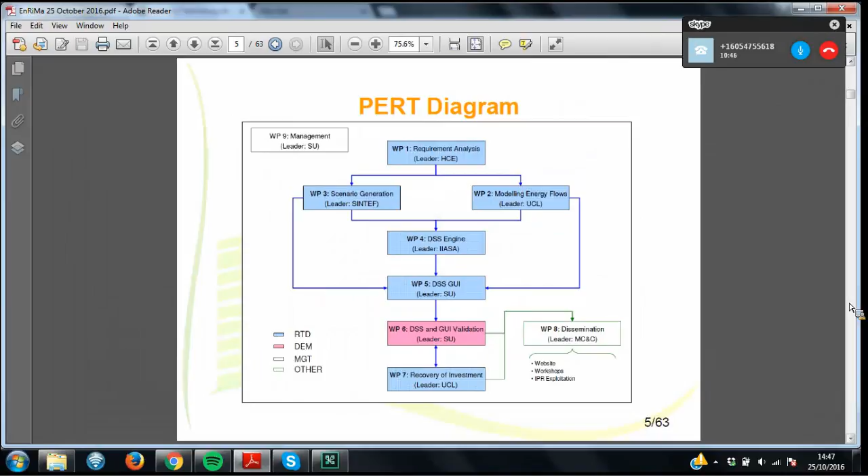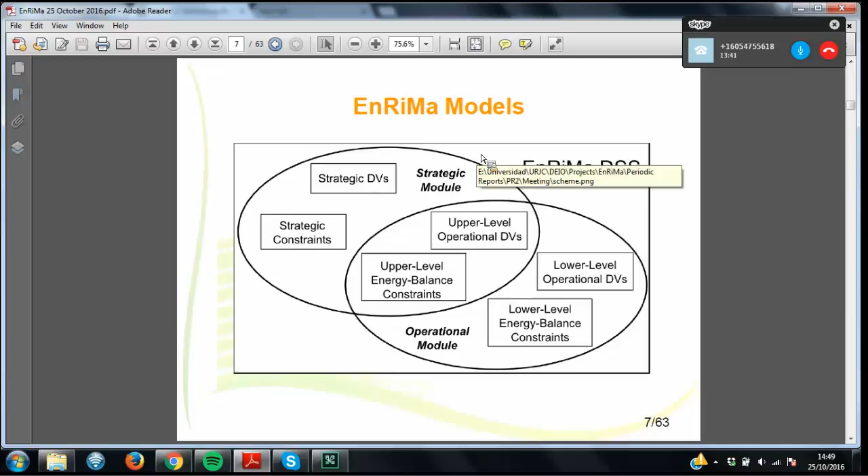Okay, so here is an overview of the operational module. So like I said, this is for the short term, and what you're trying to do is to take into account how the temperature in a given zone or a given room is going to be updated from hour to hour. This is one limitation of existing decision support systems that we'd identified.

What they assume is that there is a given energy load in every hour, and you have to figure out the cheapest way or the most cost-effective way to meet that energy load. So in effect, they're assuming that the energy load is exogenous. It is somehow data or a parameter that's being given to you, and you either have to meet it one way or the other. But in reality, that's not the case.

If you talk to a building energy manager, he or she is not going to say, I need so many kilowatt hours of energy. He or she is going to say instead, I need to keep the temperature within a certain zone in the building. So that's the way we approached it, by not assuming that we know what the loads are going to be, and instead just assuming that we know what the user's comfort requirements are going to be, and then figuring out how the temperature is going to be updated on an hourly basis.

And we have a rather simple thermodynamic model, but we think it's still better than what was out there in the existing decision support system. So what we say is that we try to link the temperature in the zone to the heat from the radiator. So there's heated air coming out of the radiator, which in itself depends on the temperature of the water coming from the boiler and how fast it's flowing.

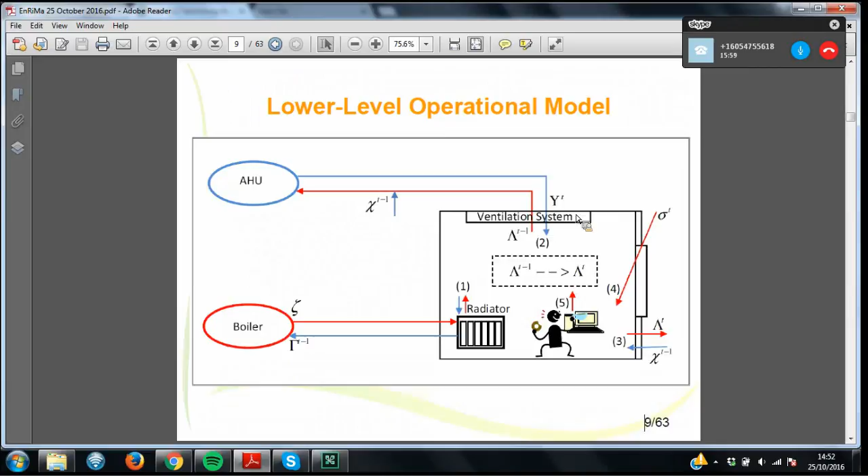So what we do next is we have this operational module, so we can run the decision support system, which will tell us what are going to be the set point temperatures for every hour of the next day for this building's heating requirements, while taking into account the thermodynamics of how energy flows around the room.

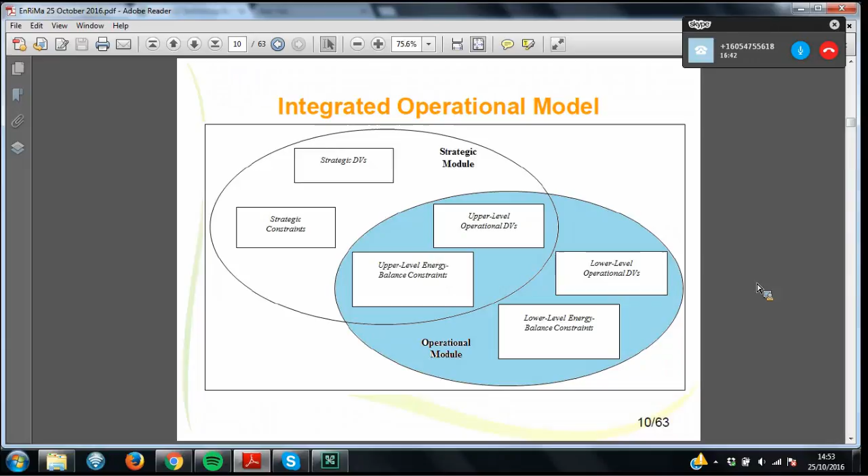And this can be affected also by what we call upper level operational decision variables. So these affect where you get the energy from. Okay, so this allows us to change the purchase and sales decisions of the site and to see if it will make any difference to the energy efficiency. So in a very abstract sense, here is the optimization model that we're solving.

We're trying to minimize the energy trading costs and the technology operating costs, subject to some upper level energy balance constraints, technology capacity limits, and storage and energy trading limits. And then the lower level constraints, which are the temperature update and bound, like I mentioned, as well as flows on the radiators and the HVAC equipment.

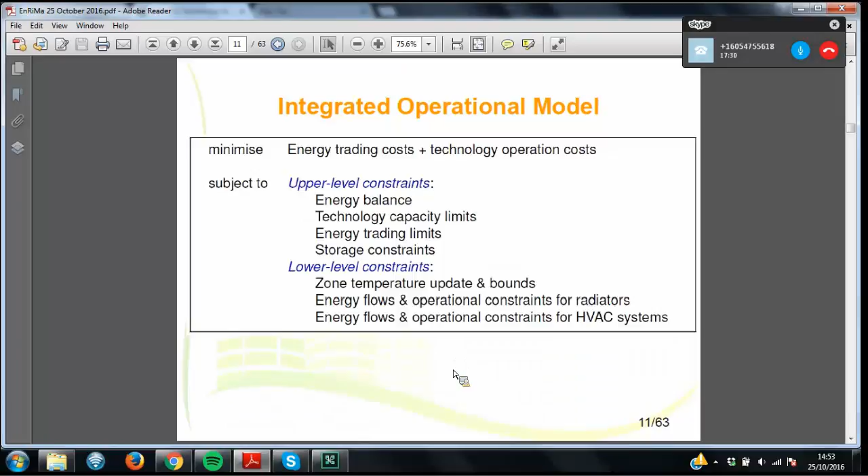So this is a highly nonlinear optimization model. Since we're doing it for the next day, we assume that we know all of the external temperatures and solar radiation and internal loads with certainty. So it's a deterministic nonlinear optimization model. And this is what we find when we run it.

So this is for FASAD, the Spanish site. And we ran several scenarios. I'll mention what they are later, but the more important thing here is the two cases. So FMT is the fixed mean temperature setting. So this reflects how building energy management systems currently work at these kinds of facilities.

What they say is that, look, depending on what the outside temperature is going to be, or depending on the time of the day, I want you to get the temperature to be a certain level. So, for example, at this site, since in the morning there's not that many people up and around, it's okay for the temperature to be about 20 degrees or so.

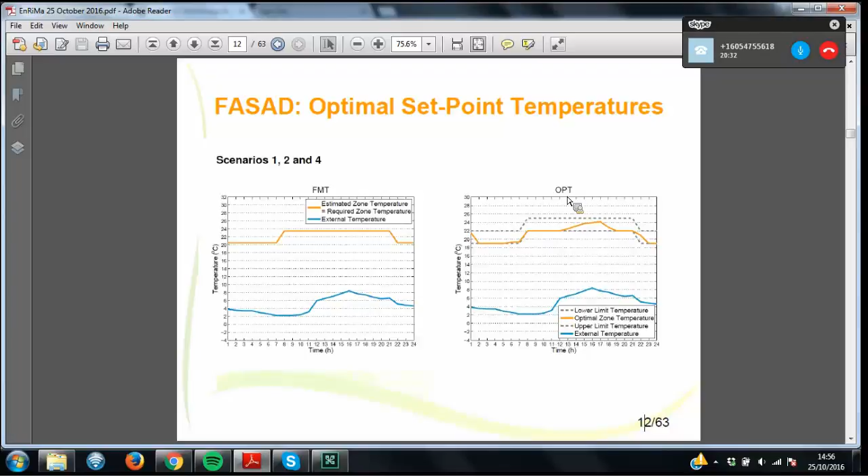Consequently, the demand for natural ventilation is also reduced. So we have almost no need for natural ventilation because we're able to anticipate what's going to happen later in the day, and therefore keep the temperature within a comfortable range. Whereas with the static BEMS, you actually need to be ventilating a lot more.

So the bottom line is that with the static BEMS, you are consuming about 700 kilowatt hours of energy for space heating demand, and it's costing you 42 euros every day, and you're producing 154 kilograms of carbon emissions. These figures are drastically reduced when you're able to anticipate what's going to happen and to run the energy system or the heating system in a more adaptive manner.

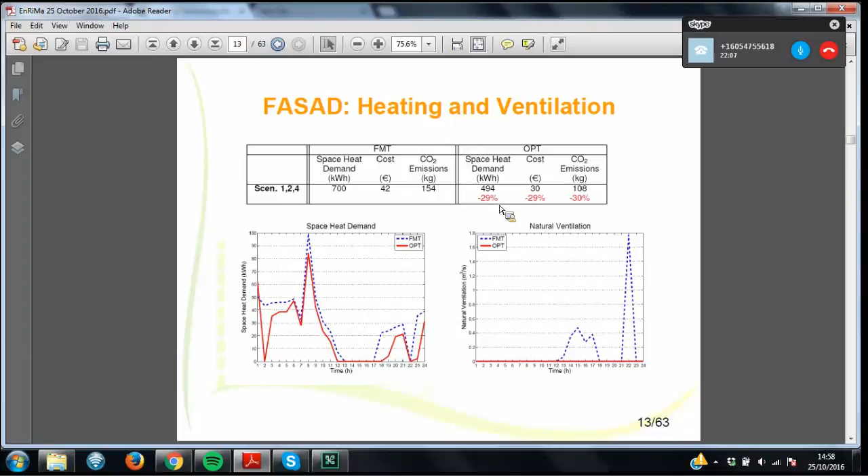Of course, these are just for the heating demand. If you look at the overall primary energy consumption, these figures are going to be not as stark. So instead of having about a 30% reduction in energy consumption, you'll have about a 10 to 15% reduction in energy consumption. We did another scenario, so the results for scenarios 1, 2, and 4 were not that different.

Scenario 3 was a little bit different because this assumed that the government of Spain says that the zonal temperature, if the heating system is being used, has to stay below 21 degrees. So in this case, you can see that with the fixed mean temperature setting, the most it can be is 21 degrees, and this results in a lot of energy savings, but still you are literally blowing some hot air out the window.

With our setting, even though we have no flexibility here in the day, because we're able to anticipate what's going to happen, we can adjust our settings early in the day and later in the day, and still come up with 15% savings. So the government can come up with more ambitious regulations, which is going to make the current static building energy management system more attractive, but it's still not going to be as attractive as what we had even without the regulation in place.

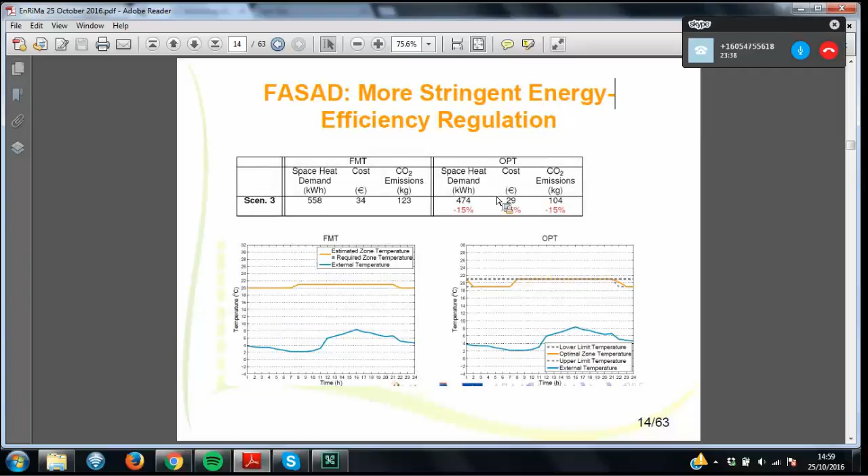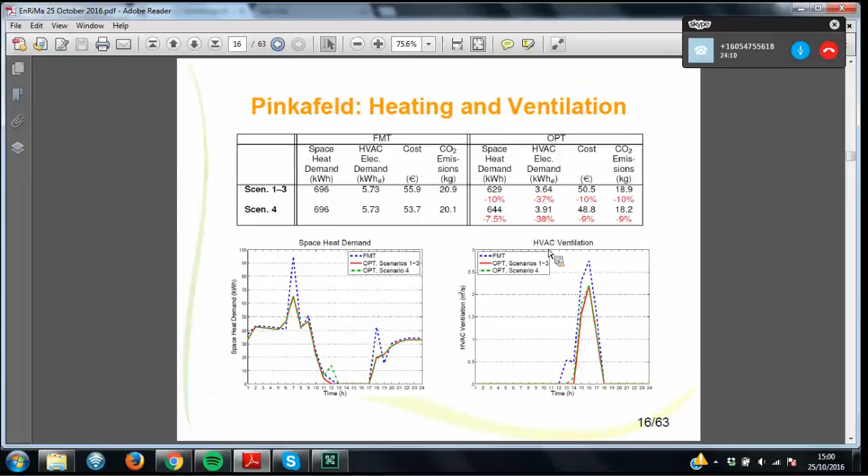You can see with the regulation in place, you can have energy demand cut down to 558 kilowatt hours, but even without that regulation, just by running the system more intelligently, we're able to bring it down to 474. So that's the bottom line, and we've had a similar pattern at the Austrian site at Pinkafeld. Again, this flexibility allows us to reduce the demand for space heating. Here, the reduction is not as great. It's about 7.5 to 10%, but still, without having to install any new equipment, just by running the existing equipment in a more intelligent manner, you can outperform the current building energy management system, even when it has policy support.

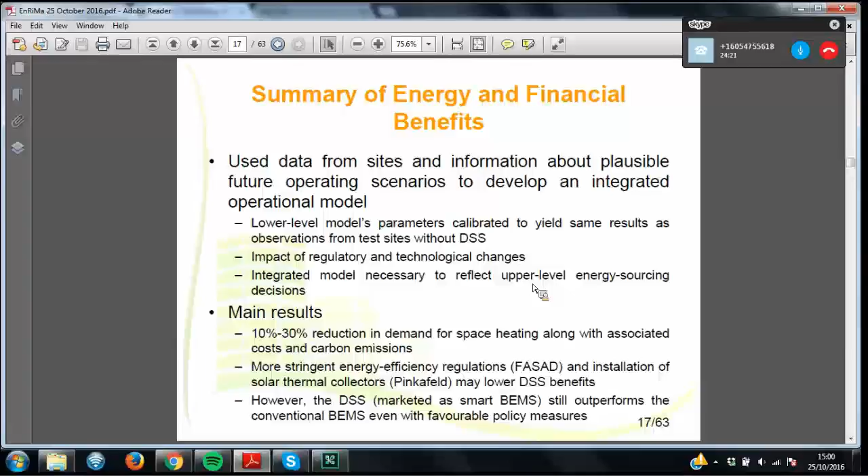So this is a summary of the energy and financial benefits. I think I mentioned that already, but we don't need to go into these details. So we came up with these models, and the models were working. So these case studies seem to be on the right track. Next thing that we had to do was to perform actual energy audits. So in this case, we had to get an energy auditor to come in and verify that energy demand is reduced as a result of using our decision support system.

So basically we had to make two additional calculations. One was that we had to verify the multi-zone to single zone calculations, because in the model, we're assuming that this area was just one zone, whereas in reality, any area of the building is going to have multiple rooms. So we needed some methodology to transfer the zonal set point temperatures to the room set point temperatures. And the other thing was to normalize the base case days to the optimization days.

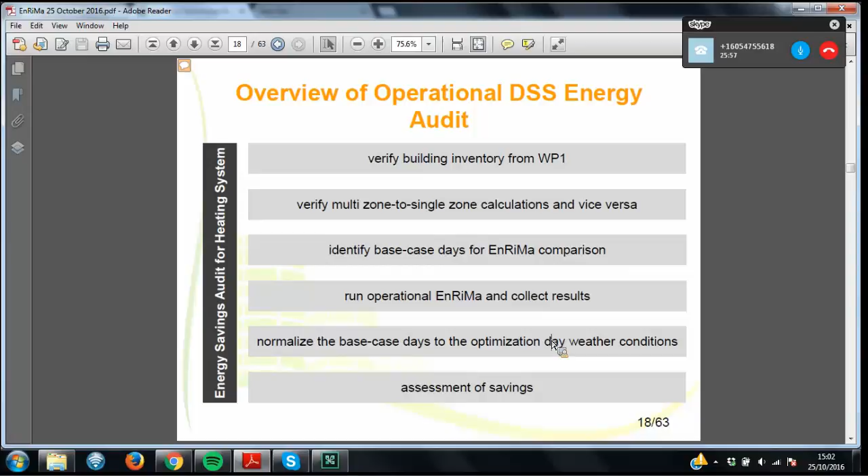So this means that we would run the building energy management system as it's currently installed on one day, and then we would come back on another day and run it with our decision support system. Now, unless we're very lucky, they're not going to be exactly the same kinds of days. One might have different temperatures outside, different kinds of solar gains, so it wouldn't be comparing like for like. So we need some kind of normalization to ensure that one energy management system is not looking better than the other one just because it happened to run on a warmer day and therefore needed less heating.

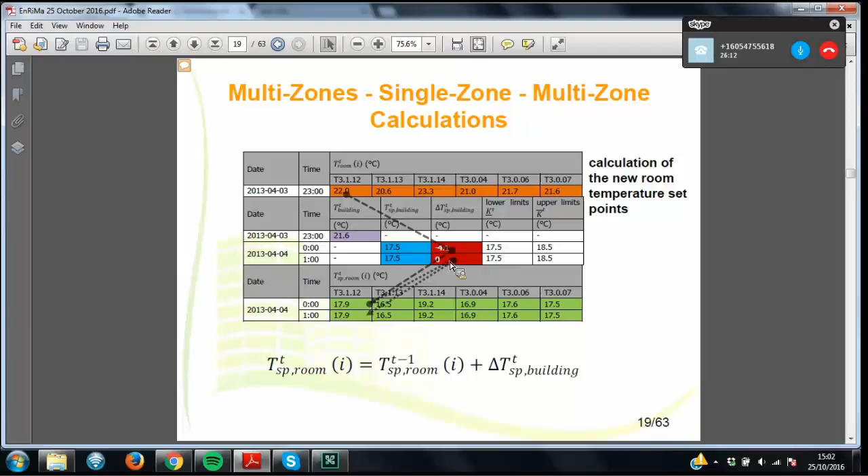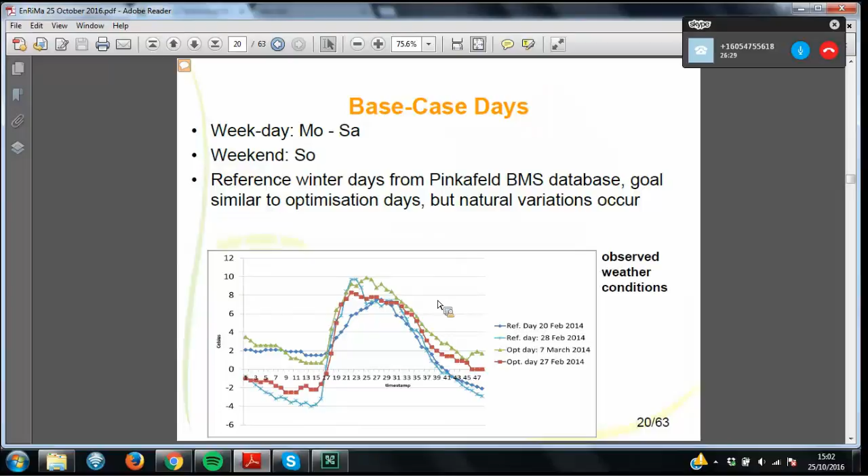So this is how we handle the single zone to multiple zone. Basically, we're taking weighted averages of the rooms by their volume and then attributing the set point temperatures. So this is not central to my point. More interesting is these base case days. We need to have some reference days in order to compare the energy consumption over the observed days. And again, these are maybe details that we don't need to go into.

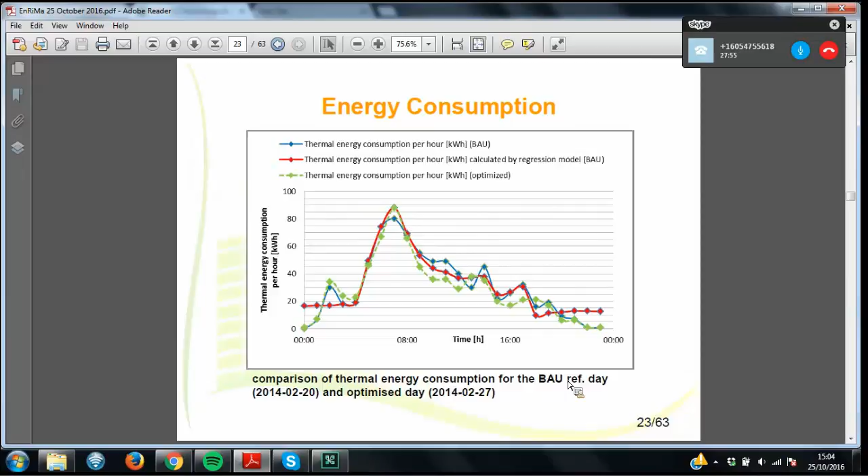So it was nice to see that what we had done as a model could actually be implemented at a real site and leads to verifiable energy consumption savings. Okay, so this is the extent of the savings, and you can see the comparison of the business as usual reference day and the optimized day.

Okay, next I will go into the long-term strategic module. So for this one, we're looking at the time horizon of 10 to 20 years, and we want to run the decision support system to do this what-if analysis so that we can get also some policy insights. So we can see how the site is going to adopt new technology, and then if we are looking at it from a policy perspective, we can also see, well, what kinds of regulations do I need to implement as a policymaker so that I can induce investment in desirable technologies.

Okay, so this kind of strategic model is promising because it can serve both building energy managers and it can serve someone in government as well who's studying the consumption of energy by public buildings. And this is important in a policy context because after 2020, public buildings are supposed to drastically reduce their energy consumption in the European Union.

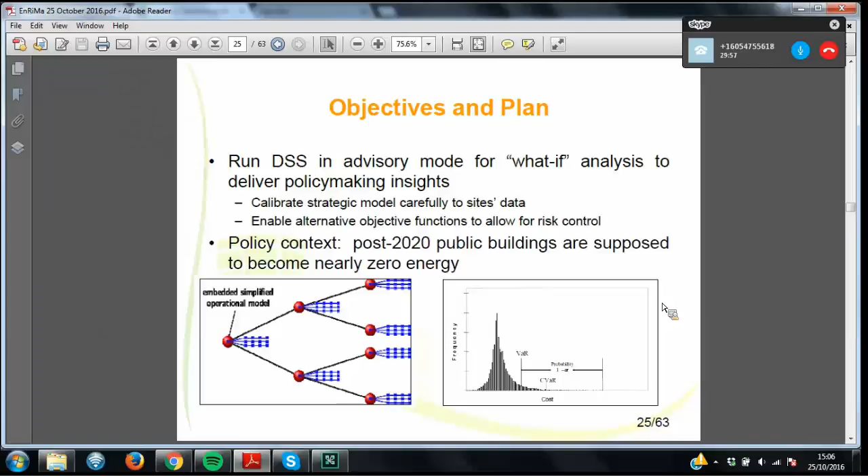So here we have a stylized density function of the costs, and we know that some managers in the financial sector, they're concerned about costs being in the upper tail. So they use this measure called CVaR, the conditional value at risk. This tells you what your expected cost is going to be given that you're in the upper 5% or 10% of the cost distribution. So we want to minimize that as well. So we not only want to minimize the expected cost, but we also want to minimize the expected cost given that the cost is going to be in the upper tail.

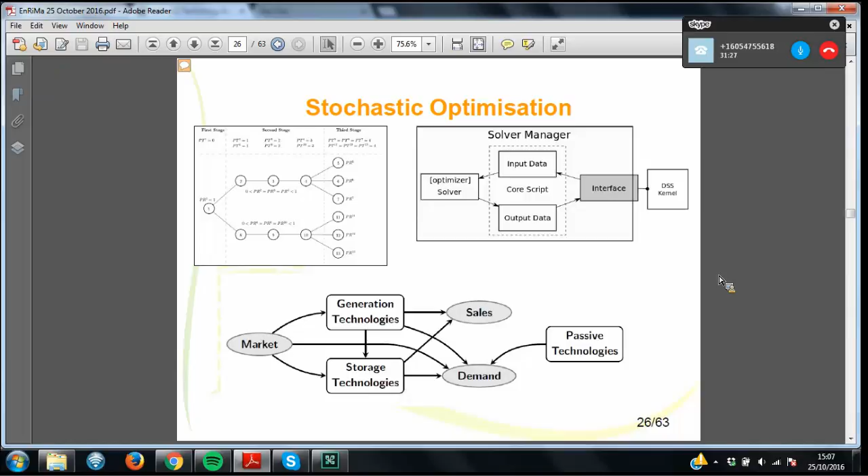So we had an automated way of handling data transfer, data input, and data output, which, as you will see in a little bit, is also something that's helpful in terms of taking this decision support system towards commercialization, because it's just one fewer thing that the user needs to worry about.

Okay, so in terms of the findings, again, we implemented this for the two test sites, and this is the one for FASAD, the Spanish site. In the first column here, we are indicating what are the costs and energy consumptions of the site if it continues to use the currently installed equipment and does not do any investment or retrofitting. So as you can see, it has a cost of about 3 million euros per year, and it has energy consumption of 40,000 megawatt hours, and it has 7,500 tons of carbon emissions.

And here is its 95% CVaR. So this is the expected cost, given that the cost is in the upper 5% of the tail. So it's a risk measure. Now, if we allow it to invest, and by the way, these numbers in the first column, they correlate very closely with the observed costs and energy consumption patterns of the facility. So we know that the model is reasonably well calibrated.

Next, we allow for investment to take place. When investment occurs, you can see that primarily CHP equipment, PV cells, and some solar thermal is going to be installed. It's going to reduce the cost by 17%.

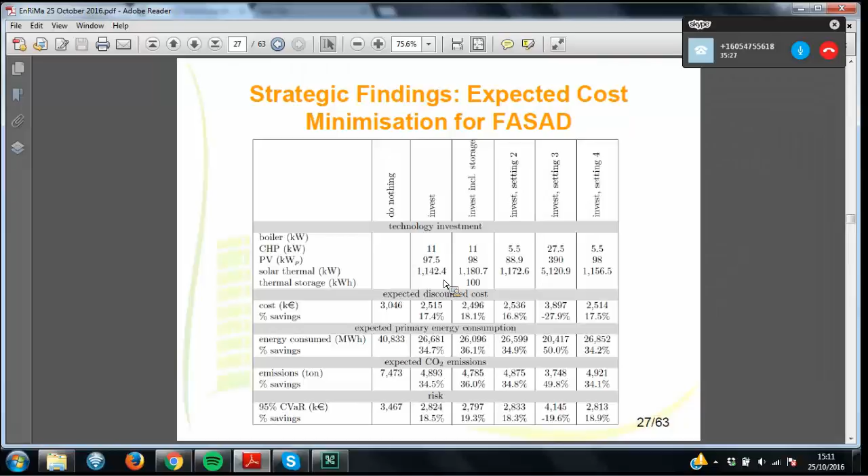And you would then have to pass perhaps regulation to make it easier for buildings like this to be able to install and operate CHP equipment, because CHP is a little bit different than a traditional kind of technology, because you need more sophisticated controls. And if these kinds of sites don't have the right support to operate the equipment optimally, then they will be hesitant to adopt them in the first place.

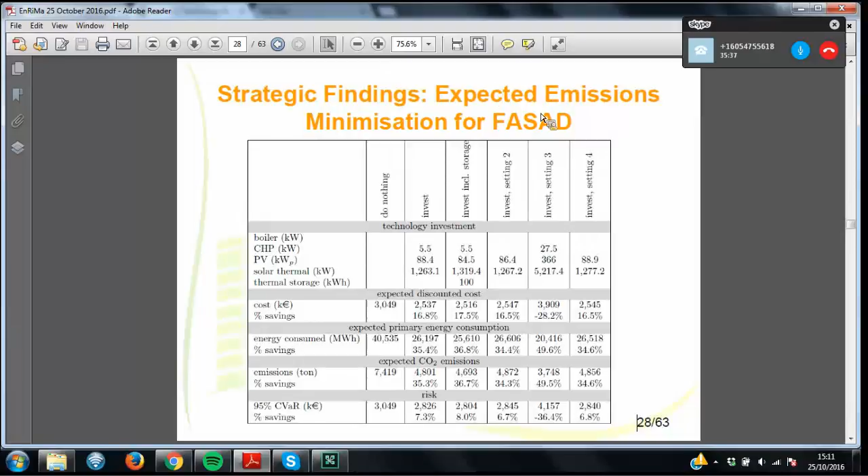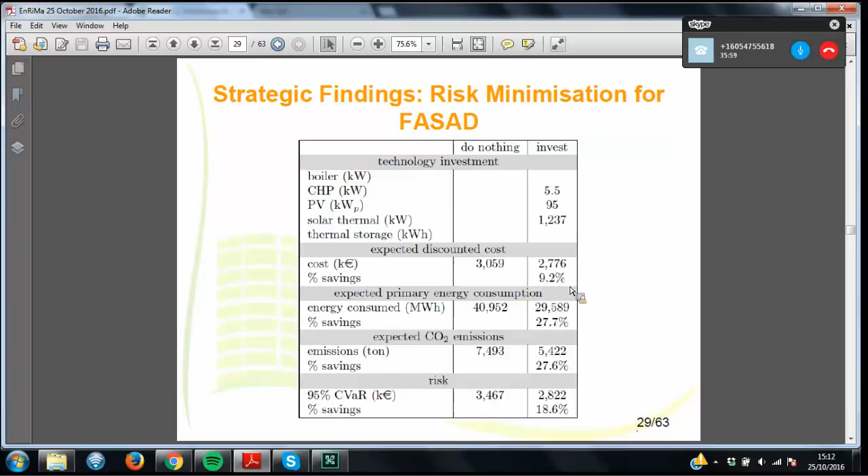Okay, then we ran a case where, instead of minimizing the expected cost, we minimized the expected emissions. The results were more or less similar, so I'm not going to go into too much detail. We ran a case where we're minimizing the risk. So you can get a slight reduction in your risk, but then your savings in terms of the costs are not going to be as high. So there's again a trade-off between the risk and the expected cost. So that's nice to observe.

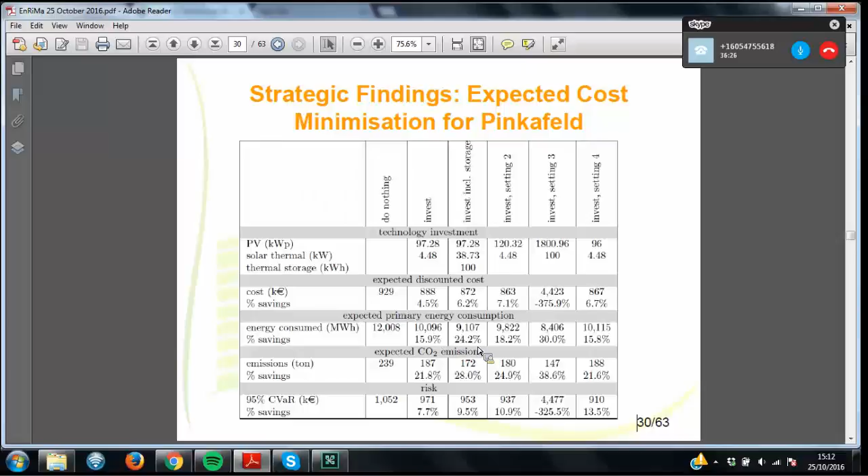And then for Pinkafeld, we had again similar kinds of patterns of results. The savings here were a bit more modest. This is because this site, Pinkafeld, was more recently renovated than the FASAD site. So here the scope for savings is slightly less, but it's still 15% in the base case, and goes up to about 24% when you allow for storage. Okay, so similar patterns here.

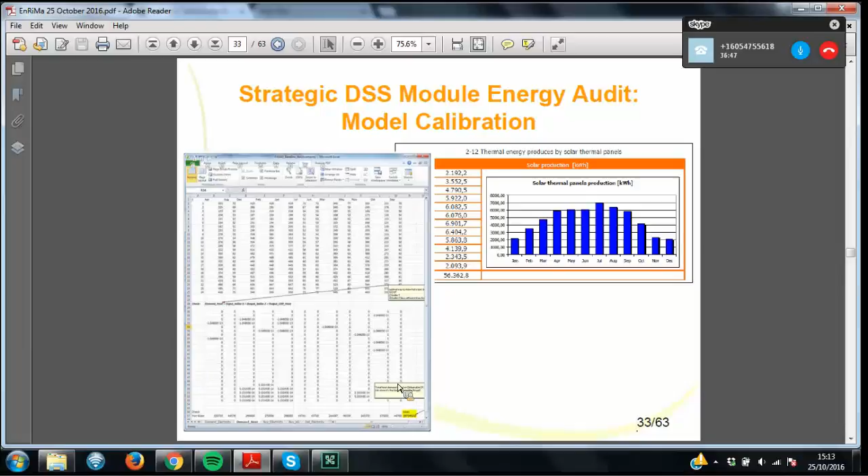We also had to do an energy audit here for this one, which we performed for the FASAD site in Spain. So in this one, the auditor carefully looked at the month-by-month consumption of the different energy types to make sure that they match with what they have observed. So our model is able to replicate the measurements that are being taken. And then the auditor found, after changing some parameters, that the scope of the savings in energy consumption is about 15%. So I think that's more or less in line with what our own studies had indicated.

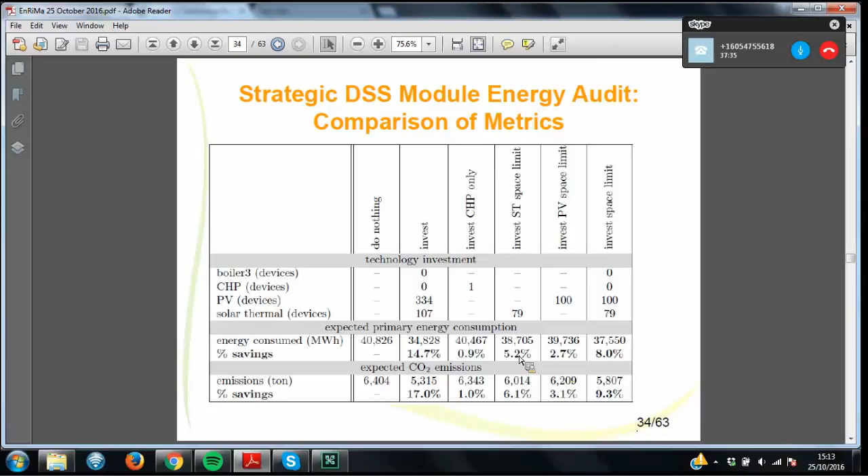And this audit also looked at what would be the impact of single technologies on their own on the scope for saving in energy. So solar thermal seems to stand out from those, but clearly it's better to have all these different technologies together. So we were able to verify the extent of the savings in energy consumption. Okay, so this is what I presented with the models.

I think I'm reaching my time limit, so I'm not sure if I should continue with this, or we can just have a little bit of a discussion about the market analysis and potential for commercial exploitation. Yes, Asaf, if you need 5 or 10 more minutes, it's possible, of course. As you prefer. Okay. Okay, then I will just take 5 minutes to say what we did with the integration.

So let me just get back here. So like I said, behind the scenes, there was this DSS kernel that was handling the data import and export with the web service. So not only sending data as inputs to the solver manager, but also getting the results from the solver manager and relaying them to the graphical user interface.

So here's a mock-up of the schematics. Again, I won't go into too much detail, but just to let you know that this was much more complicated than we had thought. And this is what makes the whole thing work in a seamless way that could take it towards commercialization, because all these annoying details about how to handle the data, how to interact with the building's current ICT infrastructure, how to read data from web services that provide, for example, external temperatures for the next day and so forth. This is all automated.

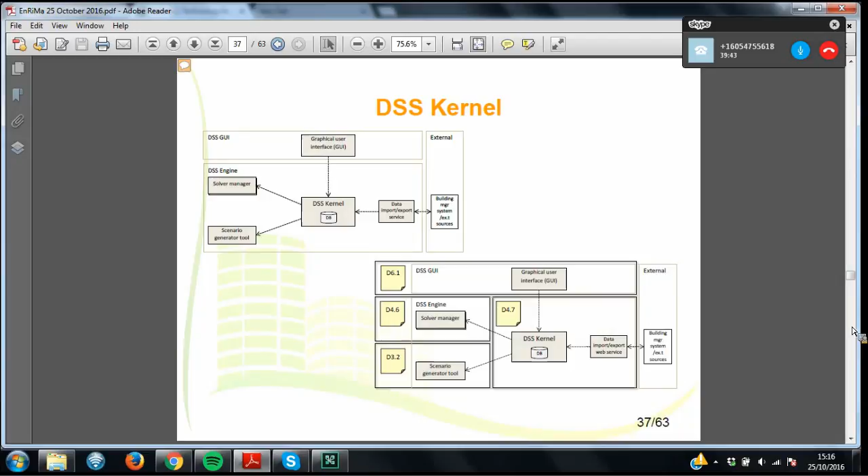Okay, so this is not very glamorous. This is not something that I would start the presentation with, but this is what bridges what we did with the market's needs. So that's why I put this in here, to show that this is complex, but it is necessary for the potential commercialization.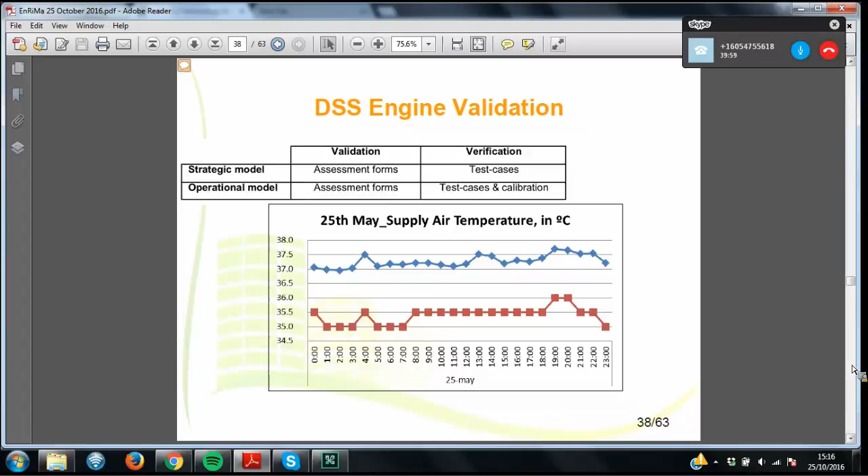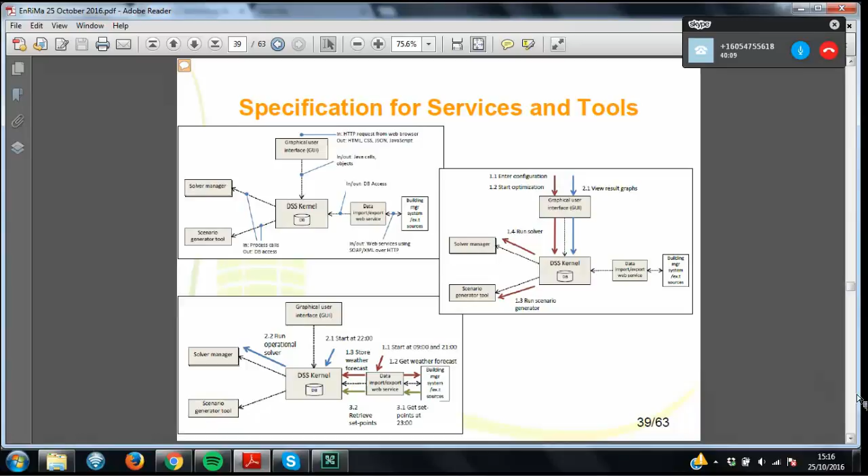We also did some cases with validation of the DSS engine. So this was done at the laboratory facility to make sure that the thermodynamic model that we had was working reasonably well. I won't go into detail. Again, this is more details about the services and tools, just to give you a flavor of how complex it can be. And then the end result is a graphical user interface. So these are just screenshots from the mock-ups that we had.

And we did a survey with this. One of the partners in the project was Hidrocantábrico Energía in northwest Spain. They had organized some stakeholder group meetings, and they had people coming to the meetings test out this decision support system, and results seem to be promising from this survey. So we think that we're on the right track.

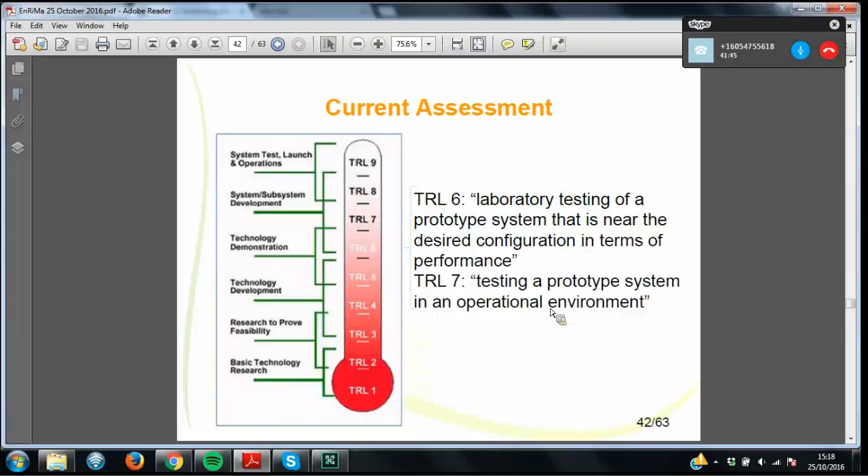So there could be owners of real estate who can use this for operational optimization or to do retrofits, and energy auditors, because as we learned after talking to auditors in our project, there's no unified or standardized way to run energy audits. So something like EnRiMa could serve as a standard.

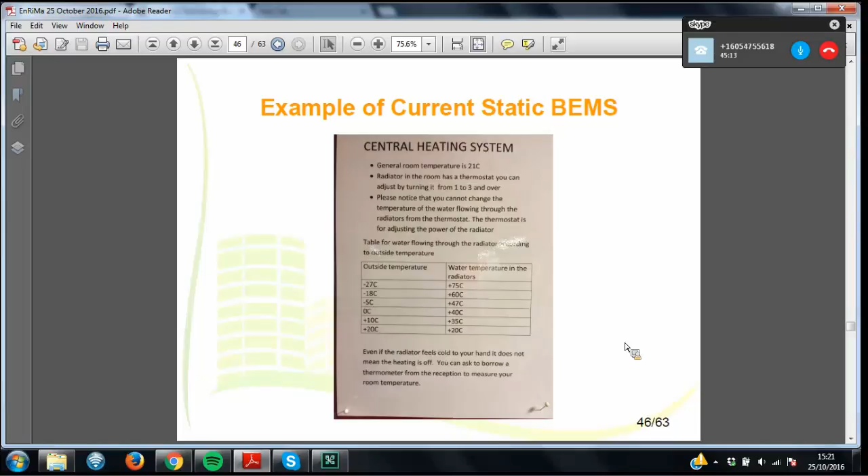You can control how fast the water flows through the radiator system, but you cannot change the temperature of the heated water in the radiator. It's just fixed depending on the outside temperature. So by having the flexibility to change some of these things, we can reduce energy consumption further.

And in terms of our offerings, we think that we can provide three kinds of technologies that could be taken forward for commercialization. There's the operational DSS and the strategic DSS, and also the integration services. So this is sort of like the solver manager and everything that it connects to, that we think also could have a position in the marketplace.

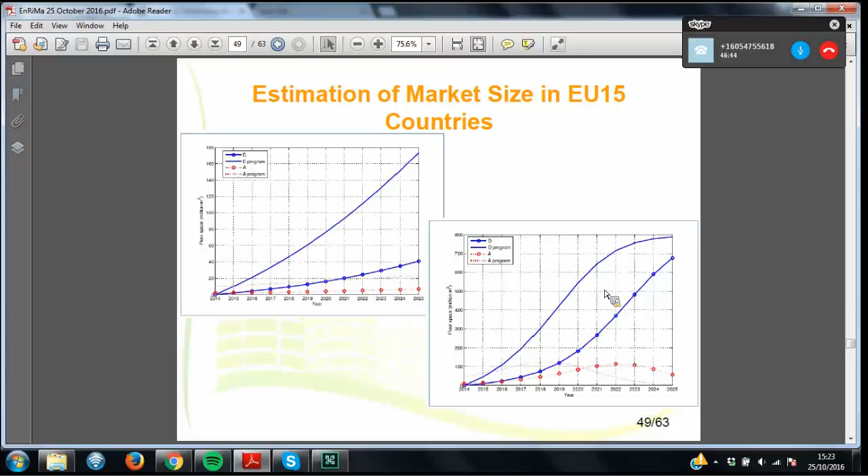So the top one is for assuming a 10% energy savings, the bottom one is with a 20% energy savings. So clearly, if we can verify that EnRiMa has 20% energy savings and we have an outreach program, those are the two factors that are going to make a huge difference in terms of the propensity for adoption. And then they did SWOT analyses for both operational and strategic modules as well as the integration services.

Again, I won't go into details, but one last thing to mention is that we had some adoption mechanisms, which are stakeholder outreach events. So this was led primarily by the power company in our consortium, which would organize information sessions and try to tailor the offering for commercial uptake. So they know the market, they can potentially develop the technology to use within the company to offer services, or they can use their position on stakeholder board groups to make other people aware of this.

We also looked at follow-on projects, so we could, for example, try to have a Horizon 2020 project or to get some funding, other kind of technology transfer funding through the EU. This would minimize the risk that's associated with new business ventures because, as you all know, a lot of new startups actually fail. So we want to secure funding in order to refine EnRiMa, tailor it more for the market in a well-defined setting. And actually, we did obtain technology transfer money through the EU's Regional Development Fund.